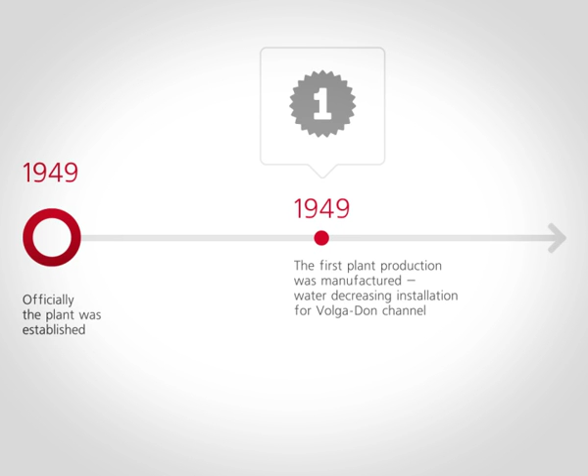Officially, the plant was established in 1949. The very first product manufactured on the plant was a water-decreasing installation for the Volga-Don channel. Centrifugal pumps range was developed for post-Second World War USSR national economy restoration. The first barrel case feed pump PE 320-180 was supplied to Pridneprovskay TPP.

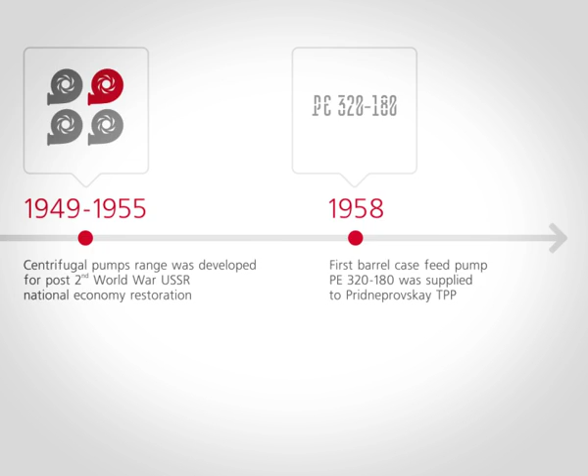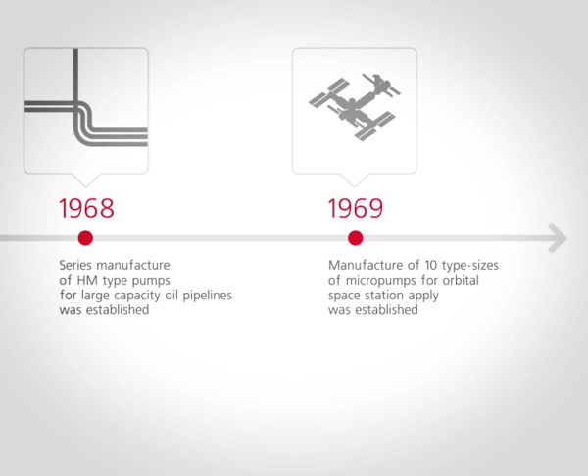Series manufacture of HM-type pumps for large-capacity oil pipelines was established. Manufacture of 10 type sizes of micropumps for orbital space station application was established. More than 1,000 pumps for nuclear power plants of the Soviet Union and some other countries were manufactured.

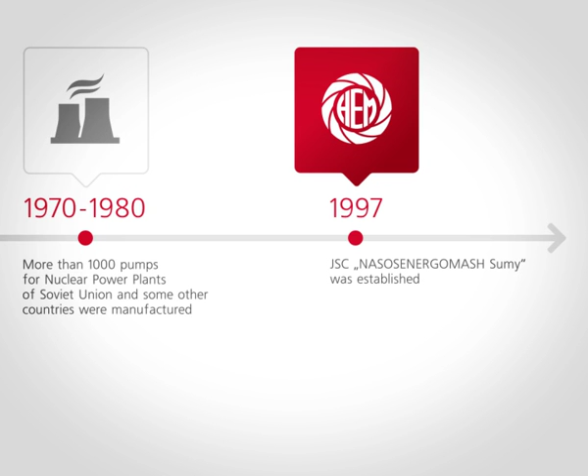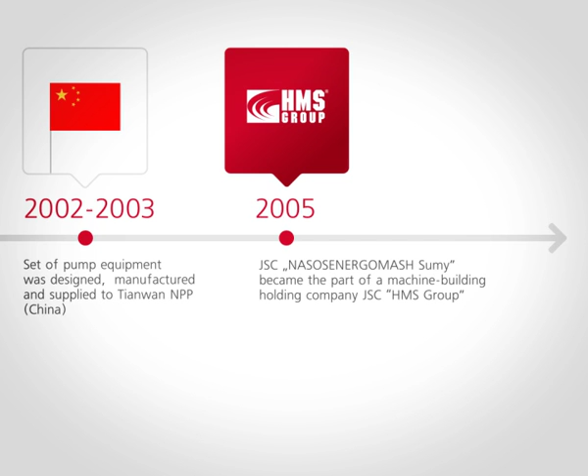Joint stock company Sumy Engineering Works NASOSENERGOMASH was established. A set of pump equipment was designed, manufactured and supplied to Tianwan Nuclear Power Plant, China. Joint stock company Sumy Engineering Works NASOSENERGOMASH became part of a machine building holding company, JSC HMS Group.

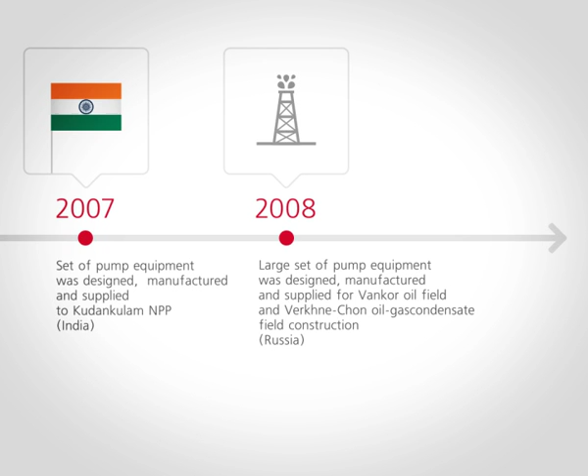A set of pump equipment was designed, manufactured and supplied to Kudankulam NPP, India. A large set of pump equipment was designed, manufactured and supplied for Vankor oil field and Verkhne-Chon oil gas condensate field construction, Russia. Among the largest projects: Yilyngynagys machine channel, main water pipeline channel Zakhmet-Turkmenkala, main and booster oil pipeline pumps for oil pipelines Purpe-Samotlor, East Siberia-Pacific Ocean, and Zapolyarie-Purpe, Russia, were designed, manufactured and supplied.

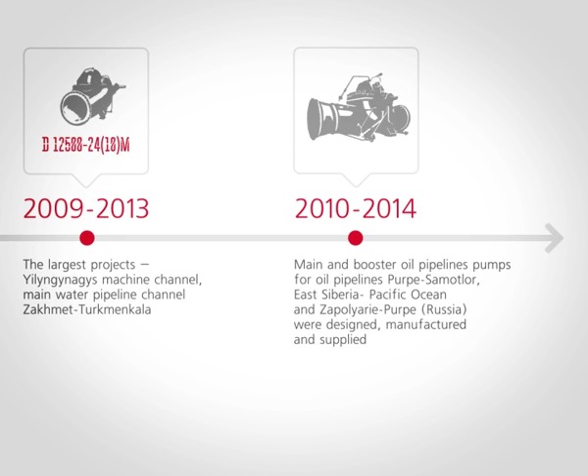A set of auxiliary and emergency cooling pumps, 36 pieces, were designed and manufactured for the 3rd and 4th units of Tianwan NPP, according to contract with CNEIC, China Nuclear Energy Industry Corporation.

From 2005, joint stock company Sumy Engineering Works NASOSENERGOMASH became part of the large multi-profile industrial investment group Hydraulic Machines and Systems, HMS Group companies.

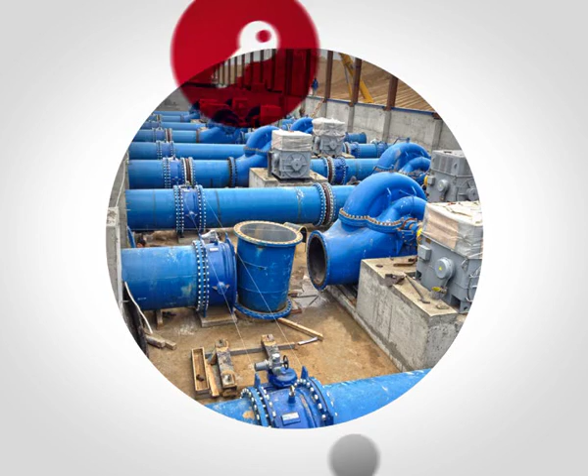Key activity of the HMS Group is EPC engineering and complex equipment supplies for the following industries: oil and gas mining, water supply and offtake, nuclear and thermal power generation.

Joint stock company HMS Group today is a well-recognized leader in design, production and supplies of pump, compressor and block module equipment. Staff: more than 16,500 employees. Number of dealers: more than 150. Equipment supplies for former Soviet Union countries, Eastern and Western Europe, Iraq, Indonesia, India and China.

Joint stock company Sumy Engineering Works NASOSENERGOMASH is one of the biggest enterprises of HMS Group. Production area: more than 81,250 square meters. Product range includes more than 600 articles.

540,000 is the overall number of pumps manufactured throughout the plant's history. Over 1,300 pumps were built and supplied for nuclear power plants. Today, the plant's product supply geography covers more than 50 countries on 5 continents.

An ambition for constant improvement of products and solutions allowed joint stock company Sumy Engineering Works NASOSENERGOMASH to get leading positions in pump production for the following industries: oil mining and transport, thermal and power generation, housing and communal services, water supply and offtake.

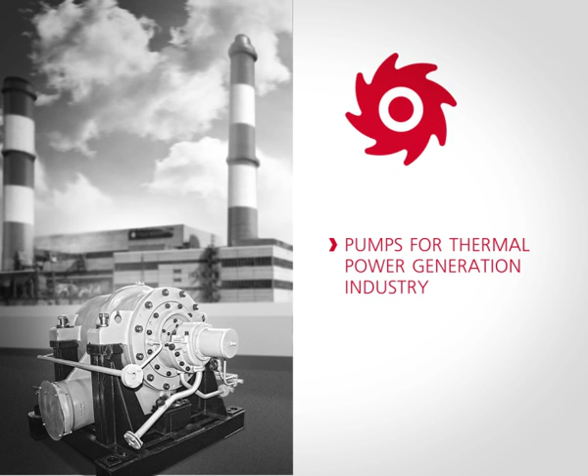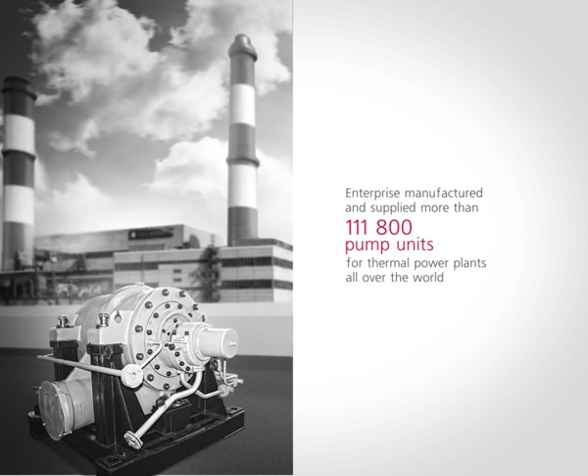Pumps for thermal power generation industry. Since the first boiler feed pumps built in 1959 to modern times, the company has manufactured and supplied more than 111,800 pump units for thermal power plants all over the world.

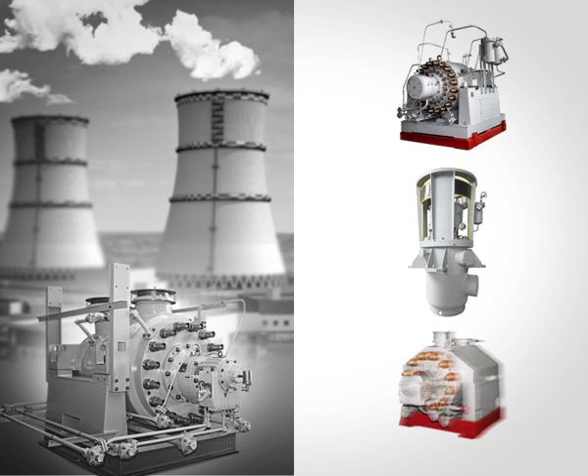Pumps for nuclear power generation industry. Sumy pumps are installed in all nuclear power stations of Russia and Ukraine. They were supplied for NPP construction in Bulgaria, Hungary, Slovakia, India and China.

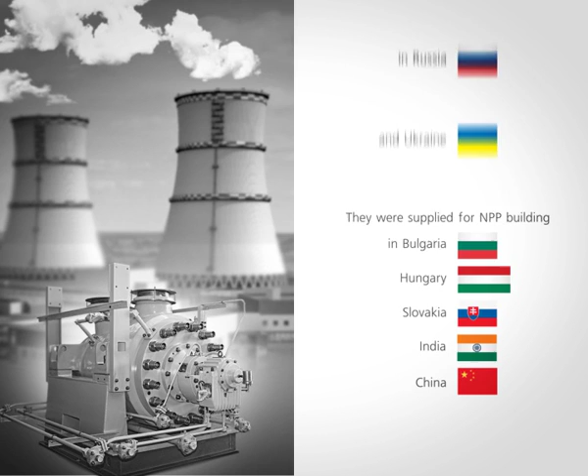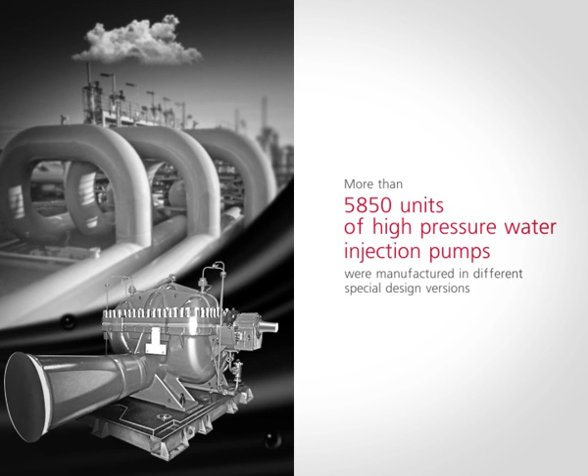Pumps for oil and petrochemicals pipeline transport. More than 5,850 units of high-pressure water injection pumps were manufactured with different customized design variations tailored for each particular customer.

Industrial pumps for water supply and offtake. More than 150,000 industrial pump units were manufactured and supplied for the pump stations of Europe and Asia.

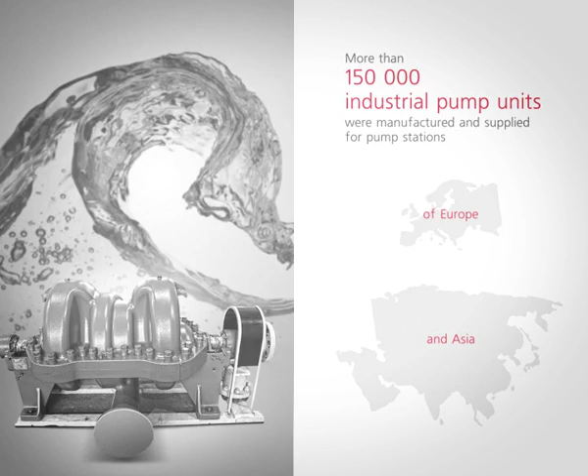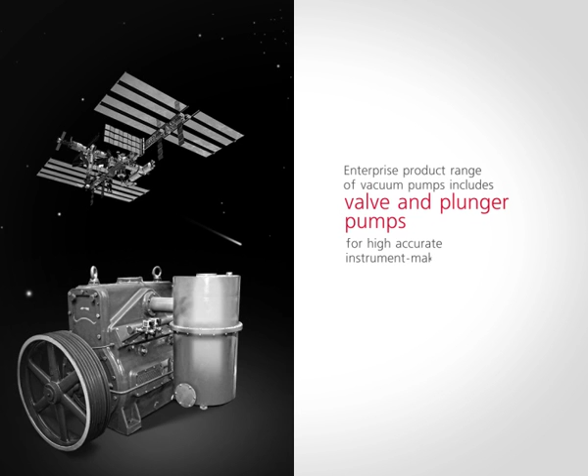Vacuum pumps for various industries. The product range of vacuum pumps includes valve and plunger pumps for highly accurate tools and instruments, microbiological installations, and electrical engineering. The enterprise's claim to success is based on years of experience and impeccable reputation.

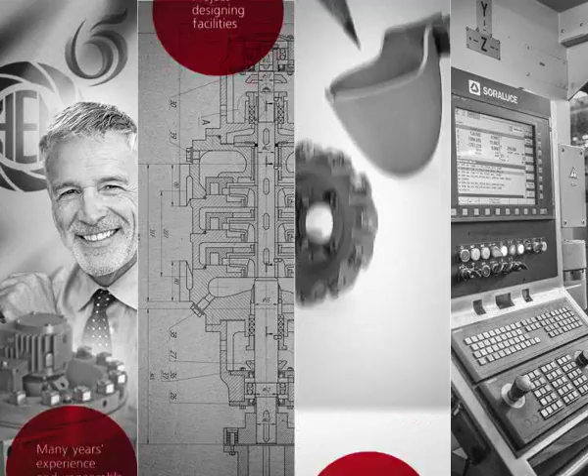Project design facilities. Closed manufacturing cycle. Innovation in production technologies, as well as business process automation, quality control, high accuracy testing, and complete after-sales service.

Project design facilities. The enterprise structure includes a powerful research and design department.

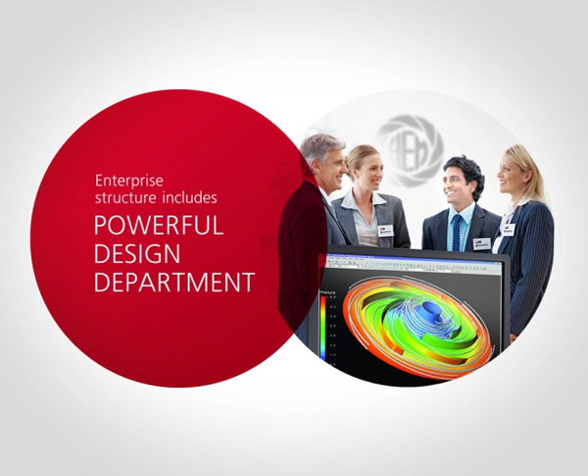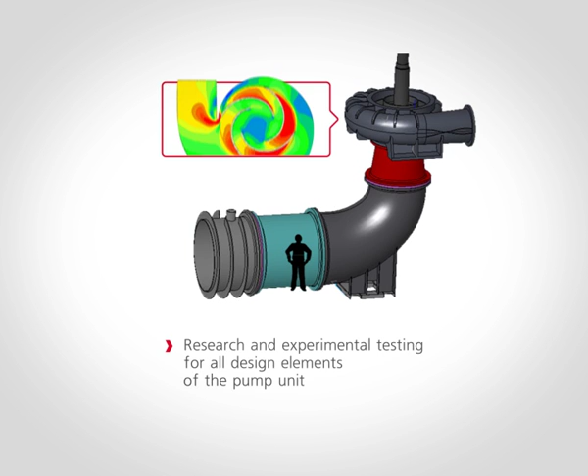Besides our own design department, the enterprise has tight cooperation with the leading Ukrainian Research and Design Institute of Nuclear and Power Pump Building, VNIIAEN. This cooperation guarantees state-of-the-art design solutions, advanced high-precision calculation methods, research and experimental testing for all design elements of the pump unit, and new technology and equipment.

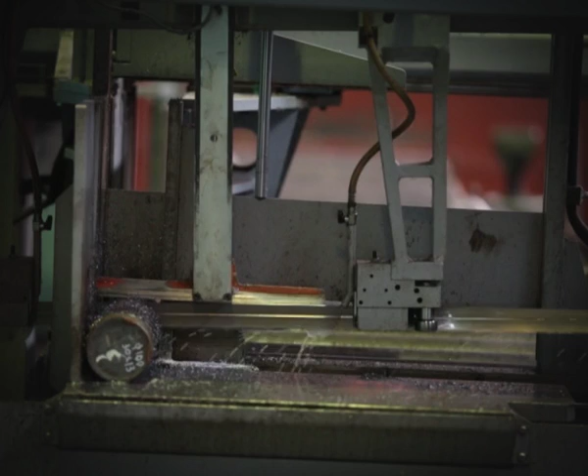Joint stock company Sumy Engineering Works NASOSENERGOMASH constantly innovates in product design and manufacture. Such policy is very important because we ship sophisticated and reliable pumps to the world's biggest companies.

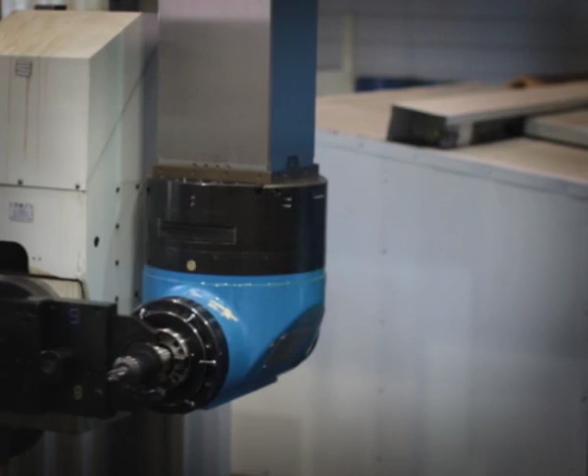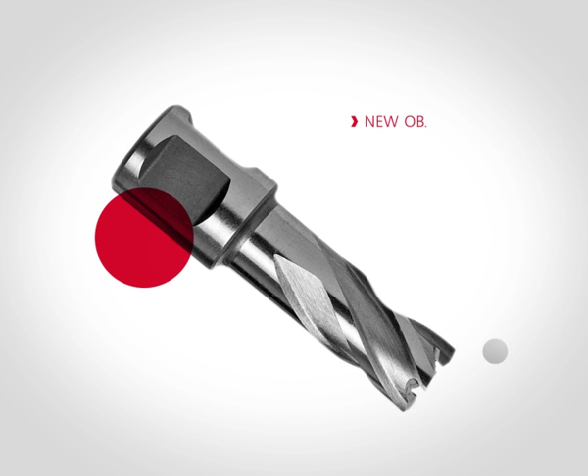All our manufacturing departments were recently modernized and their processes optimized. To ensure high quality of our products, we renew and improve our machining park on a regular basis, as well as implement new units and equipment.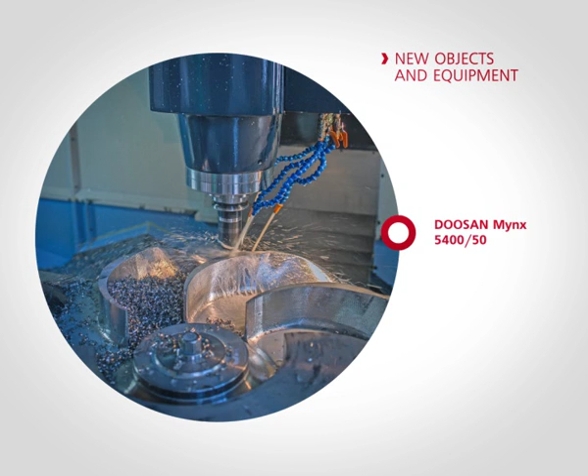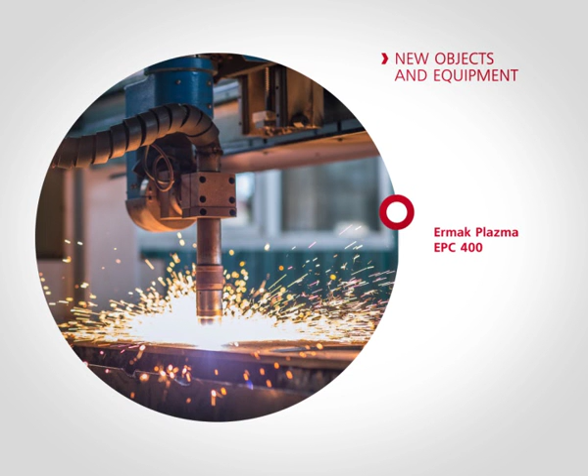To maximize foundry automation and increase casting product quality, we launched a new foundry where human factor is down to a minimum. The new foundry's annual production capacity is 4,000 tons of casting.

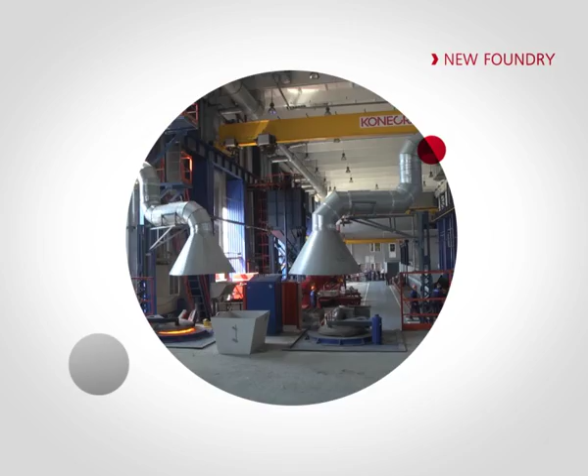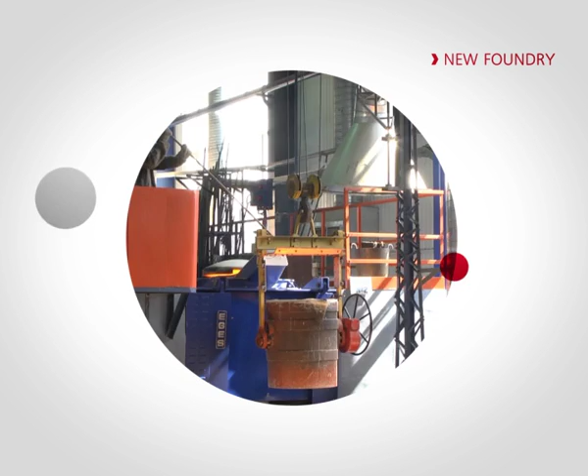New foundry product materials are the following: cast iron, different cast steel grades, duplex and super duplex steel. New foundry products comply with world's leading standards in general outlook, meticulous design, physical and chemical characteristics.

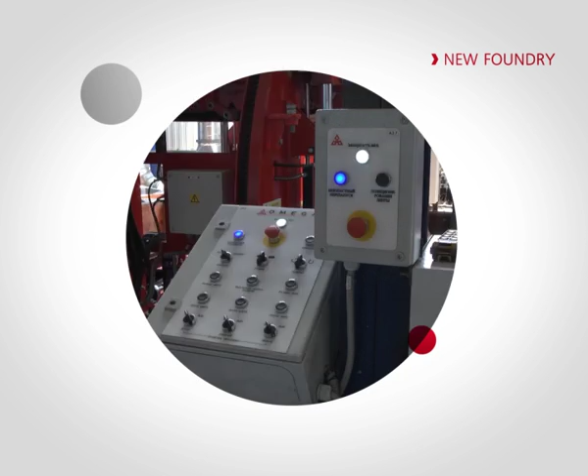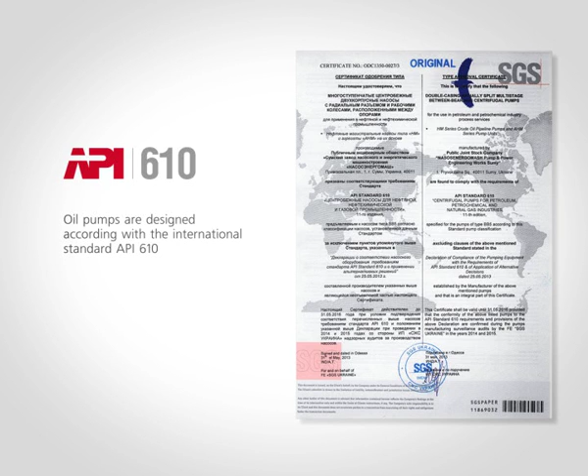Quality control: pump units are manufactured in full compliance with leading international industry standards. Oil pumps are designed according to the international standard API 610. Our oil pumps are included in the purchase list of joint stock company Transneft. Pumps for the nuclear generation industry are included in the catalogue of equipment and materials for NPP designing, building and operation in the Russian Federation.

We have implemented an integrated management system certified according to international standards OHSAS 18001-2007 and ISO 14001-2004.

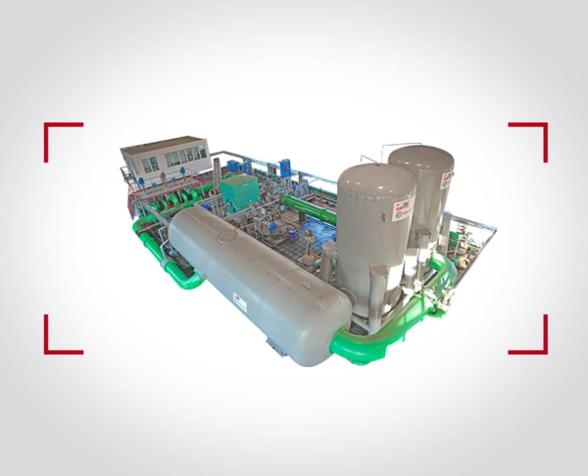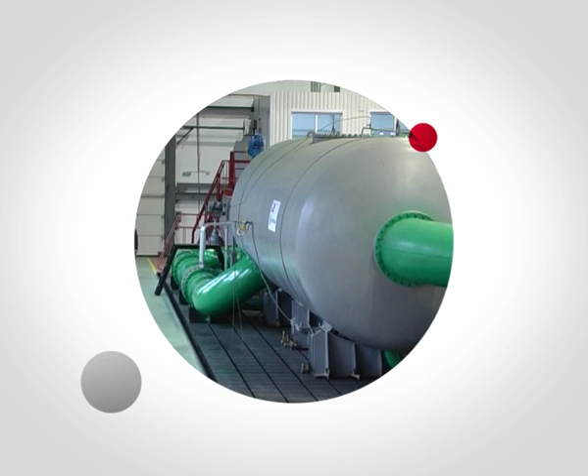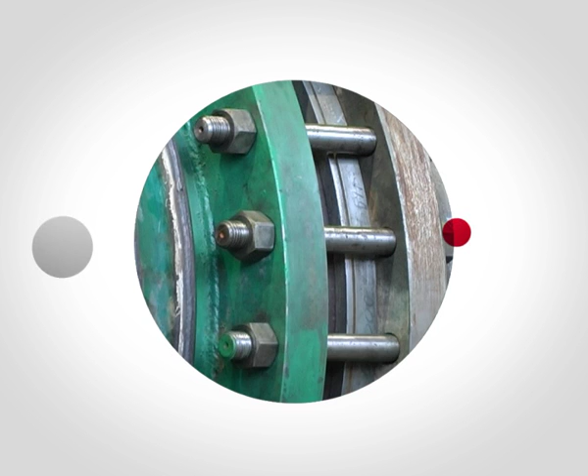High accuracy testing. What makes our enterprise truly unique is the testing complex for high-pressure electropumping units, as well as large flow units, which have no analogies anywhere in CIS and Eastern Europe. Our testing complex makes it possible to test our pump units for capacity and rotation speed. It can also be used to simulate different failure and emergency situations which could occur during actual operation. Only several of the world's leading companies have similar testing facilities, and joint stock company Sumy Engineering Works NASOSENERGOMASH is one of the leaders in this field.

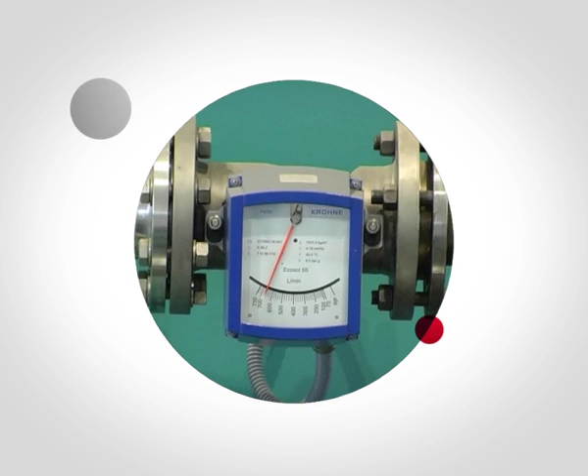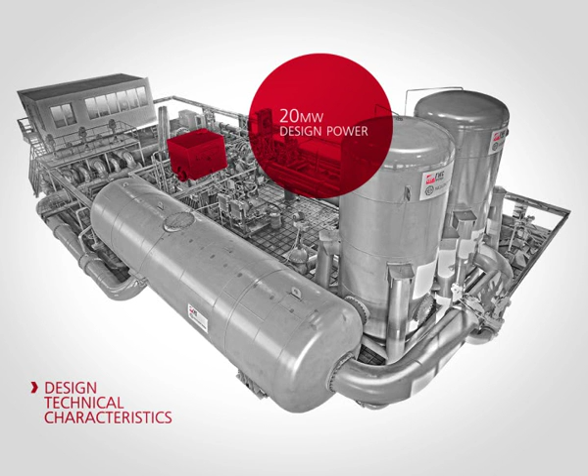Design technical characteristics: design flow 25,000 cubic meters per hour, design pressure 280 kilogram force per square centimeter, design power 20 megawatts. Taking part in large-scale international projects, over the last 5 years the enterprise has made significant progress in entering new markets.

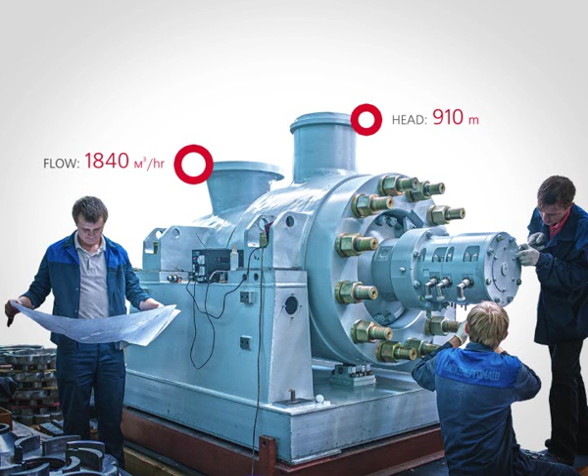Nuclear power generation industry. We take pride in one particular product, a state-of-the-art boiler feed pump for NPP, PEA 1840-80. These pumps are intended for boiler feed water supply from deaerator to steam generator of the NPP unit. Pump parameters: flow 1840 cubic meters per hour, head 910 meters. Having designed the pumps from scratch, we have supplied 20 units to NPPs of the Russian Federation over the last 4 years.

10 pieces in 2012 to Novovoronezhskaya NPP 2. 10 pieces in 2014 to Leningradskaya NPP 2.

The products of joint stock company Sumy Engineering Works NASOSENERGOMASH are used extensively by the most important facilities within the industry: Rostovskaya NPP, Leningradskaya NPP, Novovoronezhskaya NPP 2, Kalininskaya NPP, Baltiyskaya NPP, Kudankulam NPP in India, and Tianwan NPP in China.

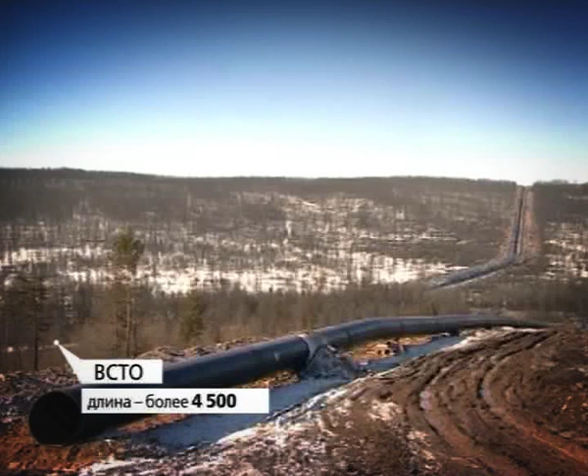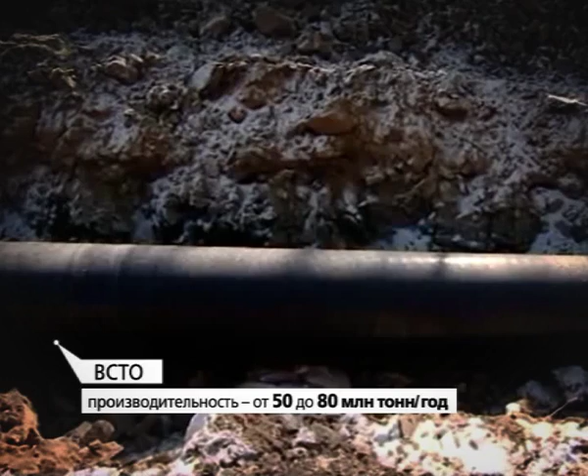In the oil industry, the main oil pipeline East Siberia Pacific Ocean, ESPO-1 and ESPO-2. The ESPO pipeline length is more than 4,500 kilometers, with capacity of 50 to 80 million tons of oil per year, and pressure of 75 to 100 kilogram force per square centimeter.

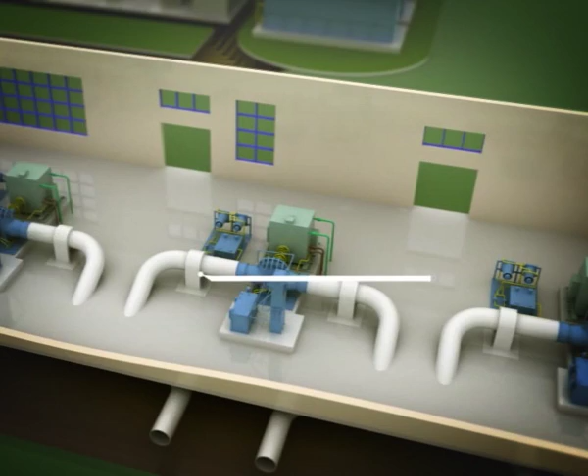To transport such significant volumes of oil, powerful pump stations are needed. ESPO pump stations are equipped with pump units specially designed and manufactured by joint stock company Sumy Engineering Works NASOSENERGOMASH. Pump efficiency around 90%, pump capacity more than 11,000 cubic meters per hour, motor power up to 12 megawatts. Pump units quantity: 48 pieces. Pump stations quantity: 12 pieces.

West Kurna is one of the largest world oil fields, situated at the Persian Gulf oil and gas deposit, with 13 billion barrels of recoverable reserve. Base formations: Mishrif and Yamama.

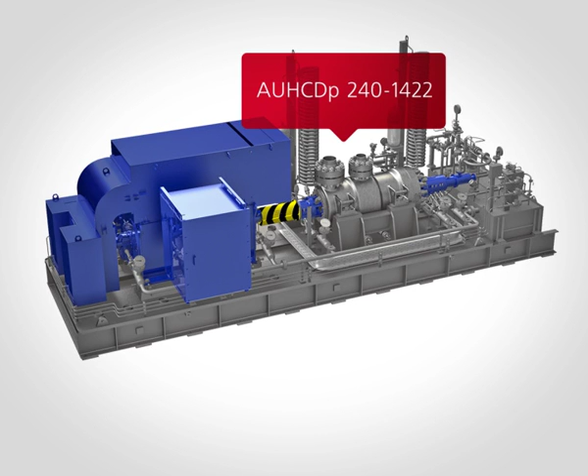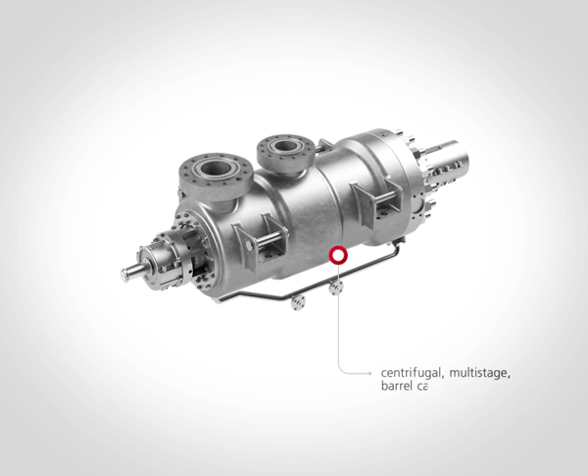High-pressure water injection pumps, AUHCDp 240-1422, were manufactured. Applied materials ensure resistance to highly mineralized, aggressive salty water. Project development was carried out according to modern international standards API 610, API 614, API 682, API 671, ASME, ANSI. Centrifugal multi-stage barrel case pumps with hydraulic balanced rotor, materials duplex steel.

In water supply and offtake, JSC Sumy Engineering Works NASOSENERGOMASH pump units are installed at all large municipal water supply plants of former Soviet Union countries, as well as the largest irrigation systems of the Middle East.

Pump stations of the Pipeline Irrigation Channel, Turkmenistan. Head pump station of Yilginagiz Machine Channel, Turkmenistan. Zahmet Turkmenkala, irrigated area 45,000 hectares. Head pump station of Yilginagiz Machine Channel, irrigated area 35,000 hectares.

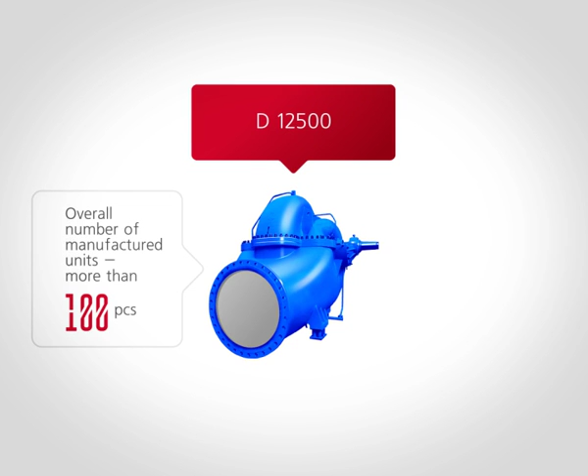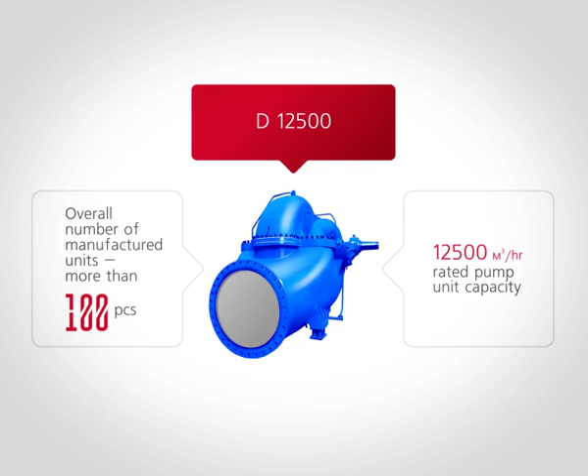Applied pump type: double suction pump of D12500 model. Rated pump unit capacity 12,500 cubic meters per hour. Overall number of manufactured units more than 100 pieces. Applied materials ensure resistance and long-term service while pumping water with significant sand content.

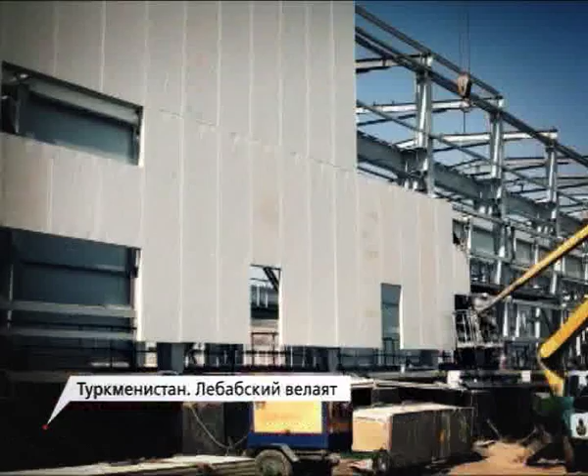Building the Yilginagiz Machine Channel head pump station. Overall capacity 35 cubic meters per second, irrigated area 35,000 hectares.